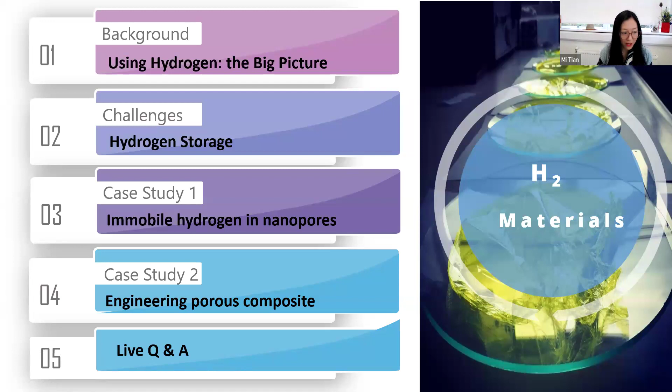So in today's lecture, I'm going to start by giving a brief background of hydrogen energy and why hydrogen matters, and one of the biggest challenges in using hydrogen, hydrogen storage. And finally, I'm going to focus on two of my research projects. I hope by the end of the lecture, we can share some common interests leading to the Q&A session.

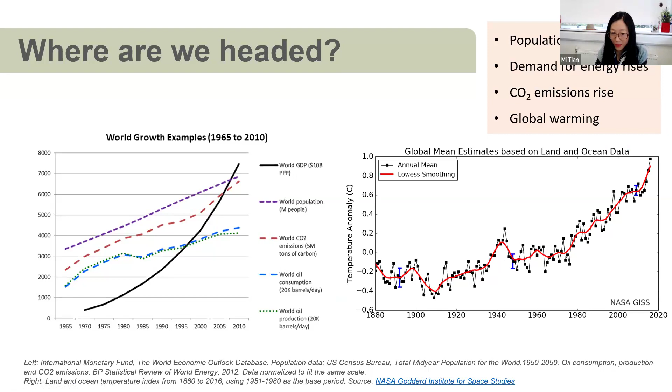It's very clear where we are headed. If we look at the world growth example, we can see world population growth, the energy consumption increases, leading to CO2 emission increase, resulting in global warming. So scientists agreed that a temperature rise of more than 2 degrees Celsius would have an unprecedented impact on our lives. So to help us stay within that 2 degrees Celsius temperature limit, carbon emissions need to be reduced to zero by 2050. It's astounding.

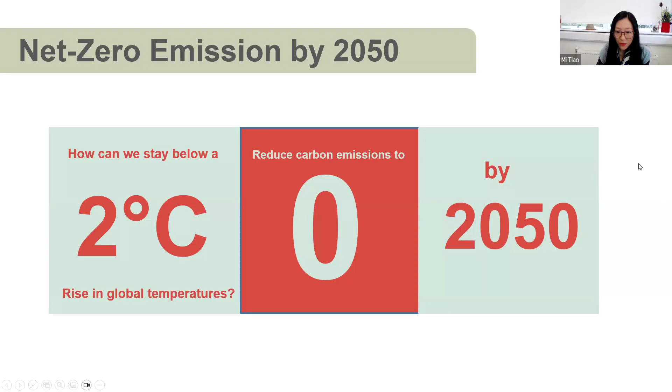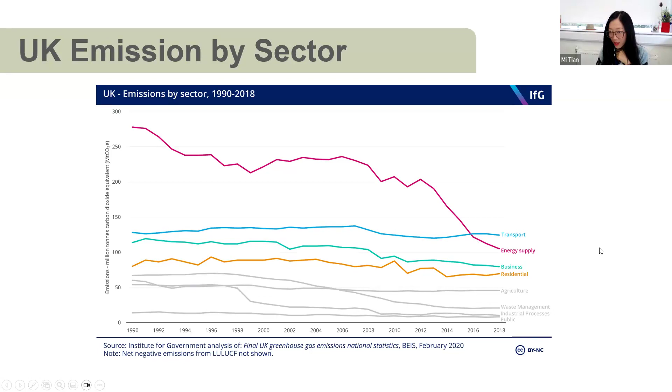So if we look at the UK's carbon emission by sector, we can see the emission from energy supply has dramatically decreased since 2012. That is because of phasing out coal in the UK. However, if you look at other sectors, transport and business, agriculture, the carbon emissions remain very stable. That's the main challenge for the reduction of carbon emission.

To deal with this energy crisis we're experiencing, and the pressure from the net zero commitment, the UK government and also globally have put a lot of attention and investment on hydrogen energy since 2019. For example, in 2020, the UK government released a 10-point plan for a green industrial revolution, in which it set a target of 5 gigawatts of low carbon hydrogen production. And after 2 years, they doubled this target to 10 gigawatts of low carbon hydrogen production. And also the government recognized hydrogen energy will play a key role in its energy security strategy.

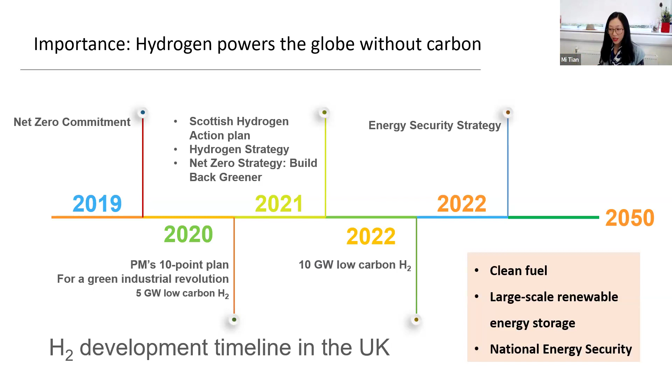So in my view, hydrogen will play a significant role in the future energy system as a clean fuel, a large-scale renewable energy storage, and it will also significantly contribute to national energy security. So that's the big picture, the background about why we are going to use hydrogen.

So we can see there's an intention to move away from carbon-based fuel to more renewable resources. And the potential for solar power and wind power is enormous, which are actually able to satisfy our global energy needs many times over. Why aren't we making more use of these resources? Why are we finding it hard to meet our targets and our commitments to renewable energy generation?

Because these renewable energy resources, solar energy, wind power, are inherently intermittent. So we can't rely on the sun shining or wind blowing, because we are not able to store the renewably generated electricity at grid level, large scale. We might only be able to turn the lights on when the sun is shining, which is not very helpful.

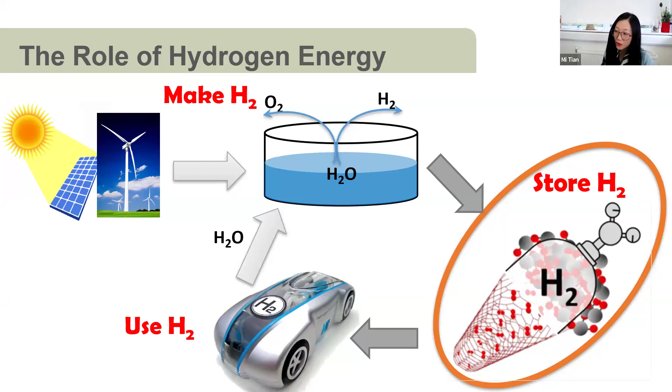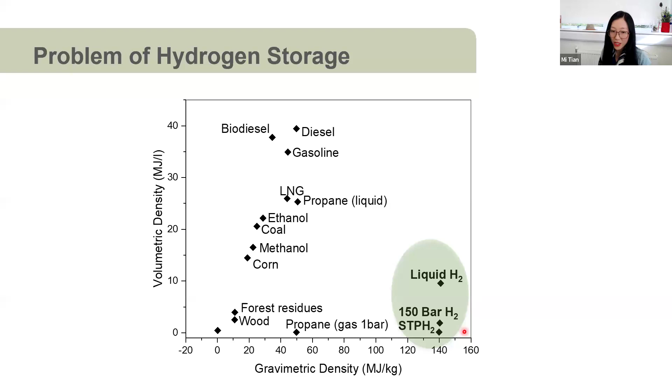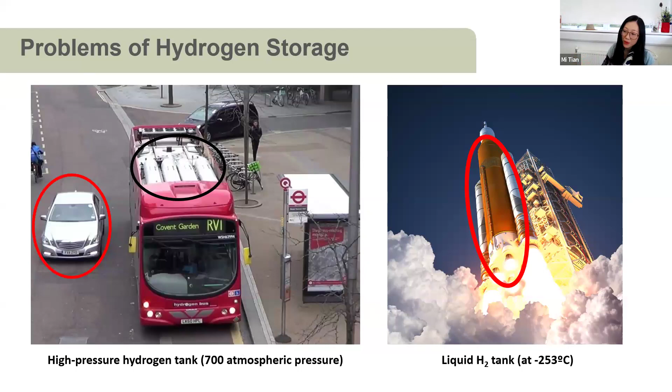Both methods, either high pressure or cryogenic temperature, are very difficult and expensive to achieve and maintain. They also pose serious risk issues. Okay, so we want to solidify hydrogen, or store hydrogen in solid phase. A solid hydrogen storage not only solves the storage problem, but is also predicted to be a near room temperature superconductor. Hydrogen phase can be changed by changing temperature or pressure.

If we think about water, that's an easy example. If we heat water up to 100 degrees C in air, then we get gaseous water, that is steam. If we cool down water to 0 degrees in air, we get solid water, ice. This is a very similar process for hydrogen gas, but hydrogen's boiling point and freezing point are much lower. To solidify hydrogen, we need to either cool down the temperature to 14 Kelvin or increase pressure to 400 gigapascal. Those are very extreme conditions, very difficult and expensive.

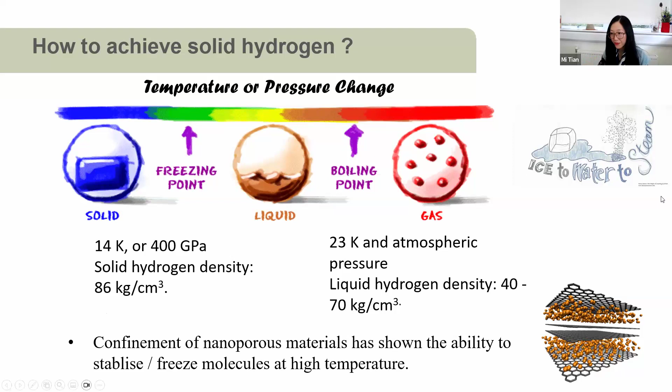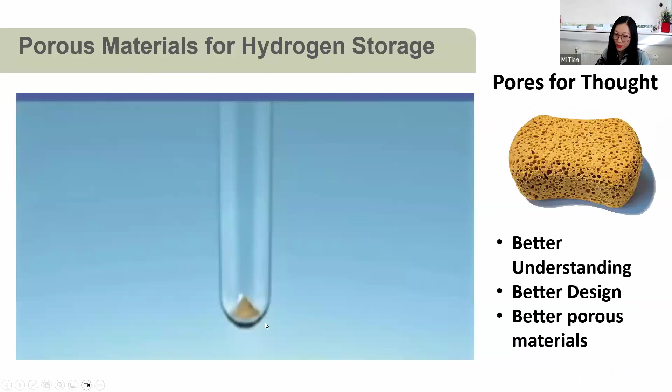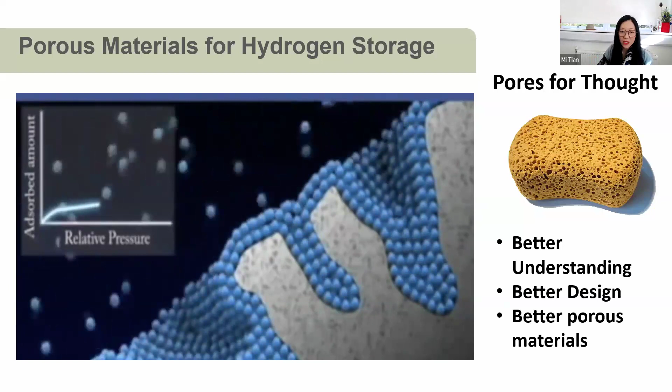And then we found nanoporous materials have shown the ability to stabilize, to freeze the hydrogen molecules at a much milder condition. The very special feature that porous materials offer is a large surface area and very tiny pores. So as soon as we expose this clean porous surface to gas, this tiny space will adsorb, compress, and store gas molecules. So we call these nanoporous materials a molecular sponge. Like a sponge absorbs water, our novel molecular sponge can absorb hydrogen.

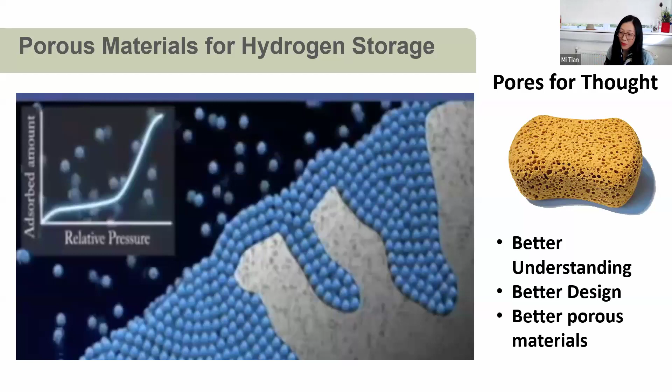So my job is to gain better understanding of how hydrogen molecules interact with the surface, therefore leading to a better design for porous materials. One of the challenges in my research is how to characterize hydrogen. As mentioned, hydrogen is a lightweight gas, is invisible, and is insensitive to lab-based technology, for example, X-ray diffraction. Therefore, we found the neutron is the best candidate for this job. A neutron is highly sensitive to hydrogen.

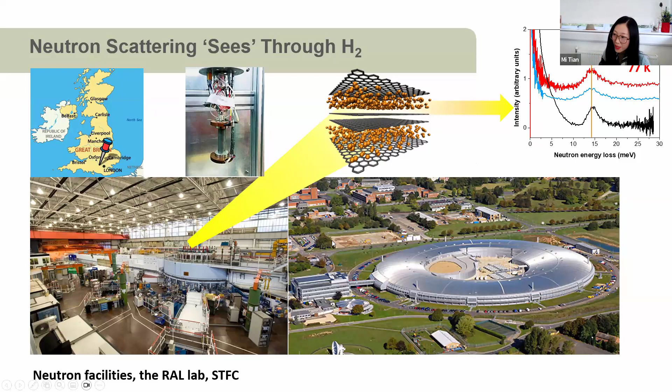A neutron beam can deeply penetrate everything, the cryostat, the high pressure sample container, the sample itself, and directly probe gas molecules inside the pores. This is a typical inelastic neutron scattering pattern. So this is the neutron reactor. The experimental procedure is: we seal the container with the central stick here, then insert everything into the cryostat underneath the floor, cool down the system to the desired target temperature, and then pump hydrogen in. Then we shine the beam through and collect the data.

At 12 Kelvin, we collected the neutron INS data, and we found a sharp peak at 14.7 meV. That is a characteristic peak for solid hydrogen, because we only pumped pure hydrogen, solid hydrogen at 12 Kelvin inside the reactor. Then we bring the temperature up to 17 Kelvin, and the solid hydrogen melts to the liquid phase. We see this sharp pronounced peak disappear, broadening into a big bump. If we continue increasing the temperature beyond 25 or 30 Kelvin, this broadened peak completely flattens. So this red curve, this pronounced peak, is for solid hydrogen.

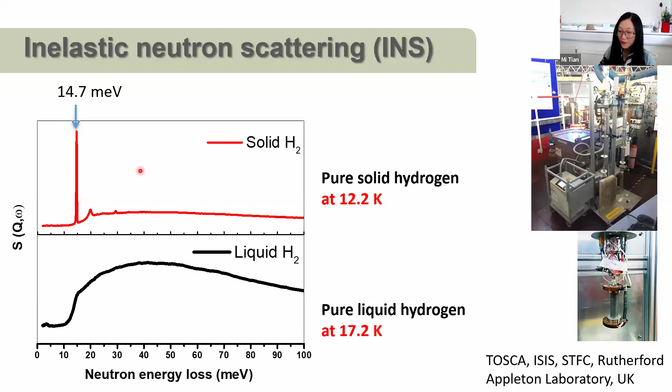And then we apply our materials following the same procedure in the neutron reactor. We pump the hydrogen in, but instead of cooling down the temperature to 14 Kelvin in order to achieve solid hydrogen, we cool down to 77 Kelvin. That is liquid nitrogen temperature, which is much more affordable, easier to achieve and maintain, okay?

So surprisingly, we see the characteristic peak at 14.7 meV. That is a characteristic peak for solid hydrogen, but by applying our material, we can achieve that at liquid nitrogen temperature. That is much more practical. And we collected data at different pressures, and we see the intensity increases, indicating the accumulation of solid-like hydrogen increases as gas pressure increases. Okay.

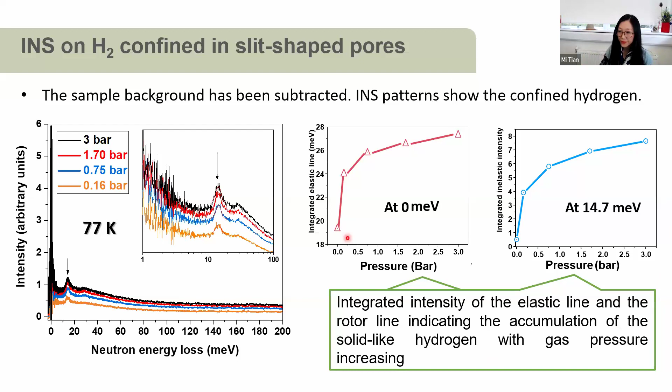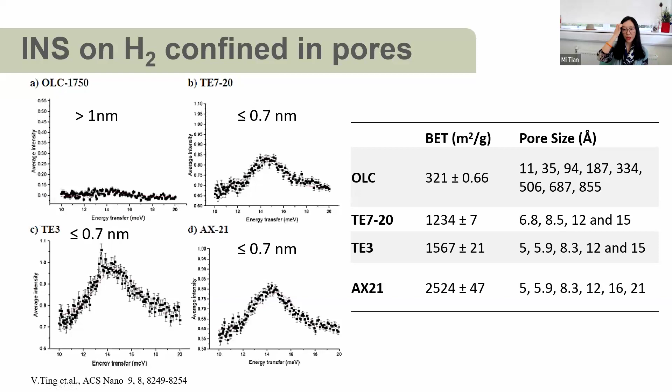There's an obvious question: do all porous materials work on this principle? Actually, no. We tested different materials, and we realized only porous materials with very tiny pores, less than 1 nanometer, can solidify hydrogen at this condition. For example, this onion-like carbon has a pore size larger than 1 nanometer, and we don't see the solid hydrogen peak. This means when the pores of a porous material are too large to accommodate solid-state hydrogen, it's not very useful in this case.

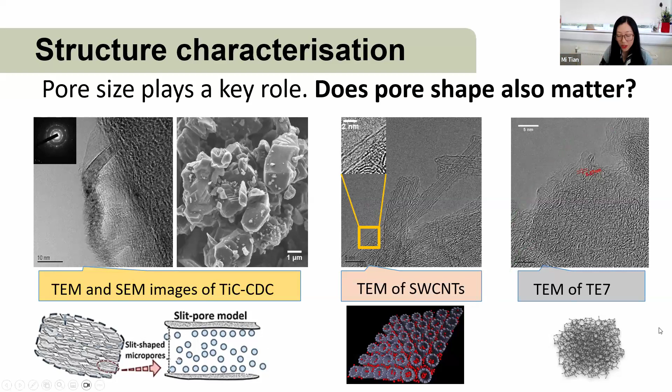We know the pore size plays a key role; we need to keep the pore size smaller than 1 nanometer. But does the pore shape also matter? To answer this question, we selected 3 different pore shapes. The slit-shaped pores: we can see the few-layer carbon sheets represent slit-shaped pores. We also have single-wall carbon nanotubes representing cylindrical pores. And also completely amorphous carbon. From the INS experiments, hydrogen can be confined in different pore shapes as long as the pore size is small enough.

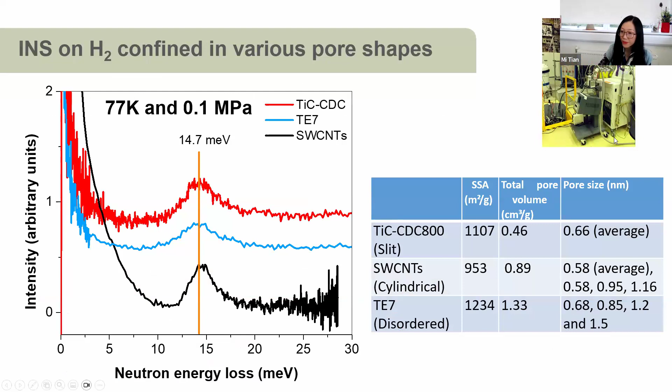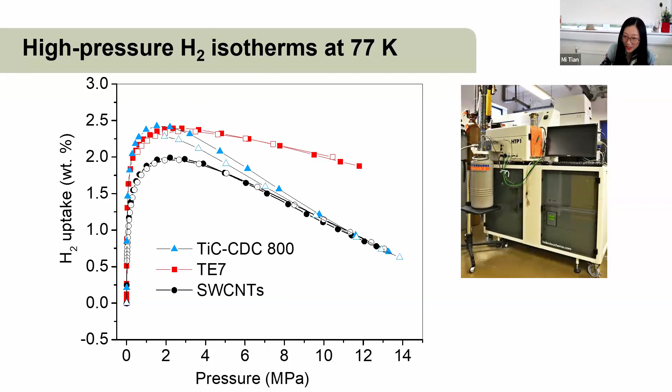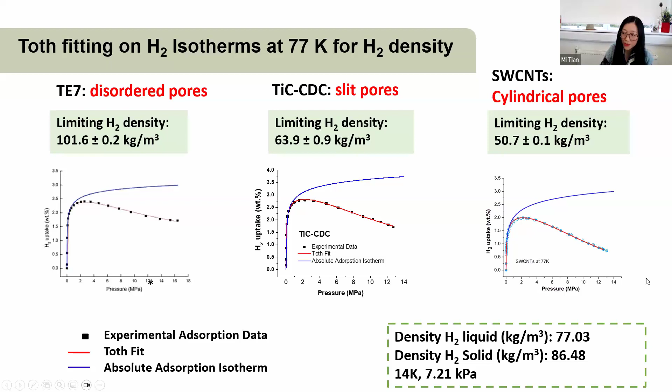Of course we care about how much hydrogen the material can store. We carried out high pressure hydrogen adsorption at 77 Kelvin, liquid nitrogen temperature, and we found the single-wall carbon nanotubes have slightly lower hydrogen storage capacity. From the high pressure gas adsorption, we can calculate the hydrogen density inside the materials. We found that the amorphous carbon has the highest hydrogen density, even in the solid hydrogen density range, and the single-wall carbon nanotubes have the least hydrogen density.

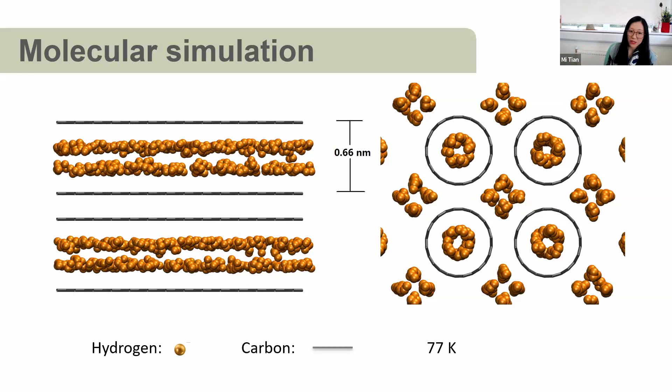On the other hand, in cylindrical pores, from the right-hand figure, we can see the structure of confined hydrogen is different. They are in a spherical structure with a certain mobility. So the density is much less than the two-layer structure. That explains the reason behind the hydrogen storage measurement.

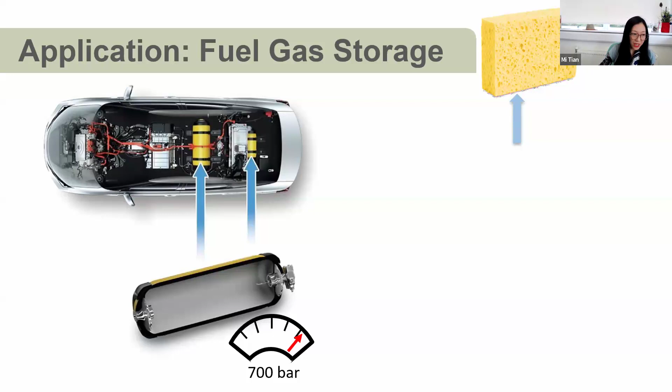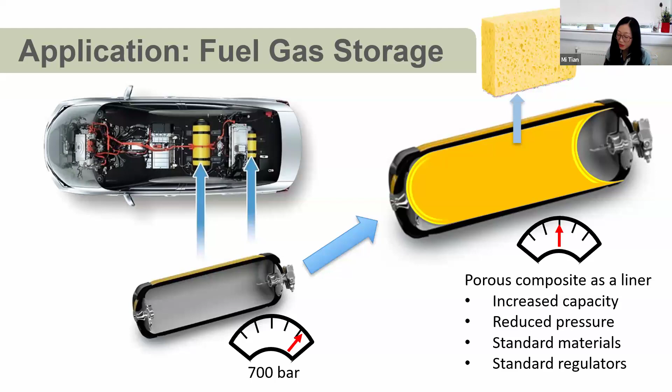So we achieved success in this theoretical study, and we know the optimal pore structure for hydrogen storage. Based on that, we decided to engineer our material for a new generation hydrogen storage tank. We want to have a liner inside the high pressure hydrogen storage tank using our porous composite in order to either increase the hydrogen capacity or reduce its pressure. Therefore, we can use more standard material and standard regulators, reduce the cost and improve the safety.

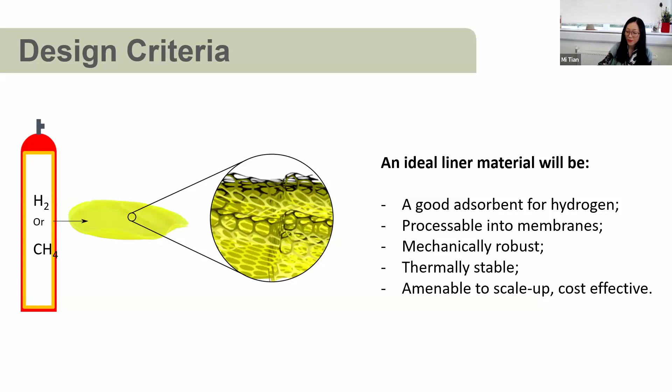Our design criteria for the ideal liner material: a good adsorbent for hydrogen. It also can be processed into membranes, because most current porous materials are in powder form. Powders are very difficult to manage in industry, and especially we cannot really use powder inside the hydrogen tank with the super high flow rate. Therefore, we need to find some material that can be processed into membrane. And it needs to be stable and robust. So we found the polymer of intrinsic microporosity.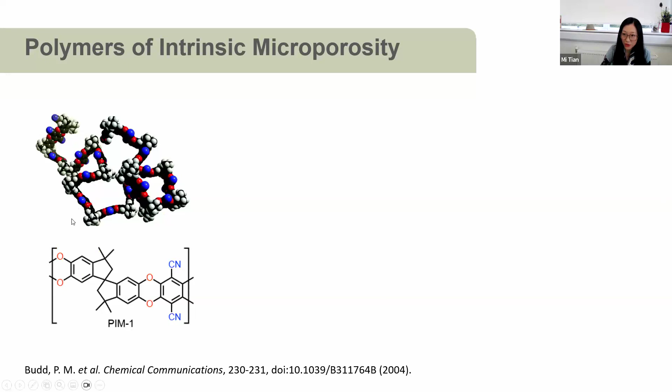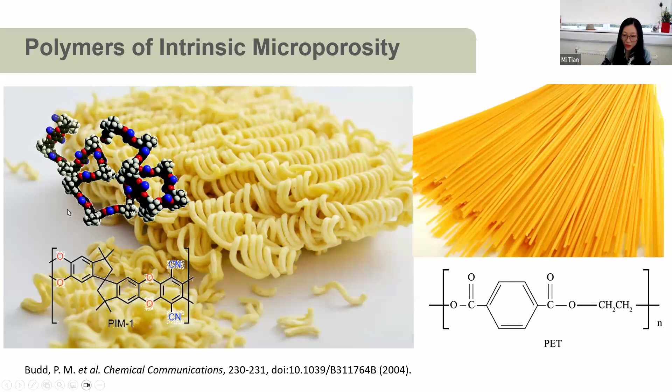You can see this is the molecular structure of PIM-1. PIM-1 is not like a traditional polymer. A traditional polymer has a long linear chain which can be packed efficiently, so there are no voids. PIM-1 is very special. It's got this rigid, contorted angle here, which cannot be packed efficiently, leaving a lot of voids in its long chain. That is where the porosity comes from.

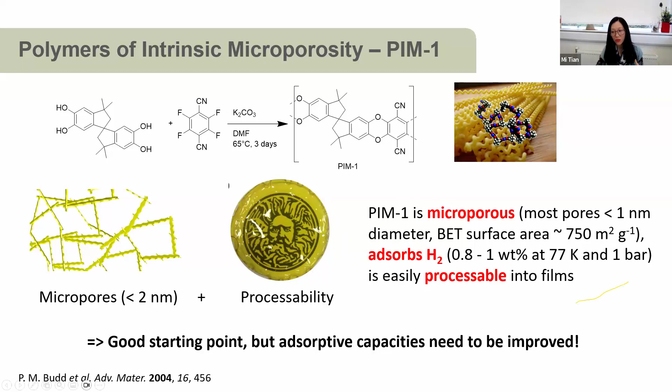So PIM-1 is a microporous material. Most of the pores are less than 1 nanometer, and that is the ideal pore size range for hydrogen storage. It can adsorb hydrogen from about 0.8 to 1%, which is not really ideal, but okay. The most important property of PIM-1 is it can be processed into membranes, transparent yellow membranes. So this is a very good starting point. But the porosity is low; hydrogen storage capacity needs to be improved.

In order to improve its hydrogen storage capacity, we doped PIM-1 with different porous fillers, for example, PAF-1, one of the MOFs, and activated carbon. All those porous fillers have an extremely high surface area, around 3,000 square meters per gram, and also a small ideal pore size less than 1 nanometer, good hydrogen adsorption capacity, and are also stable. So by doping PIM-1 with porous fillers, we can combine the good mechanical properties and processability of PIM-1 with the good hydrogen storage capacity of porous fillers as a composite.

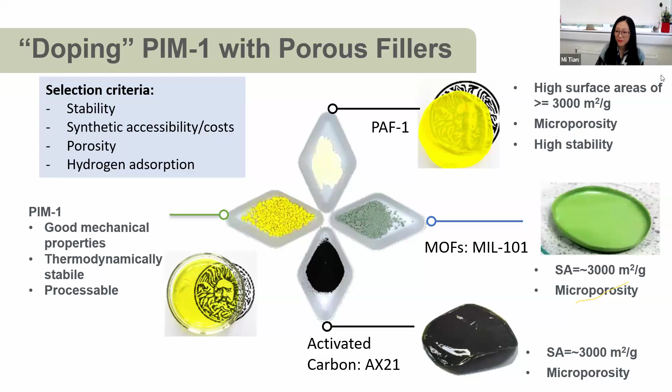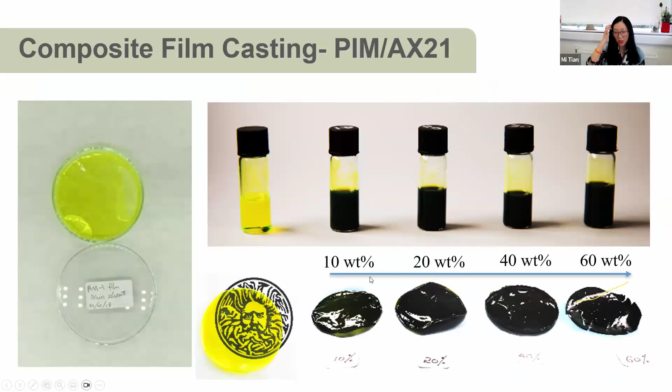These are composite membranes we fabricated. We dissolve the PIM-1 powder granules into DMF, and then we mix with different porous fillers at different concentrations. Then we cast it into a Petri dish. When everything has dried out, we can lift the freestanding robust film up, just like the video shows here.

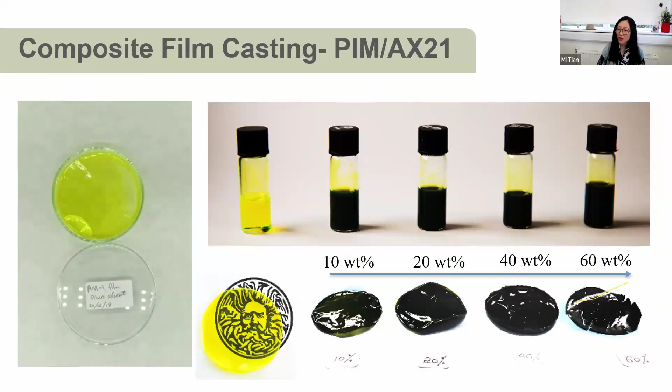So these are different. The black films are actually the PIM-1 activated carbon composite membranes. These two are PIM-1 with different porous fillers. And we can see, obviously, as the concentration of fillers increases, the transparency decreases and flexibility decreases. At some point, the membrane cannot hold its physical properties and cannot form a membrane anymore. It's loose and completely loses its mechanical properties. So there's always a balance between the hydrogen storage capacity and mechanical properties.

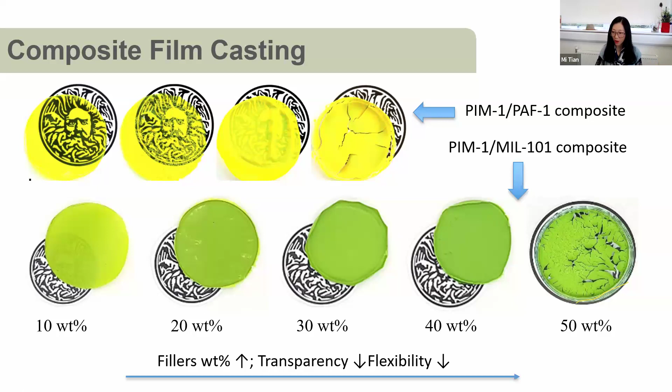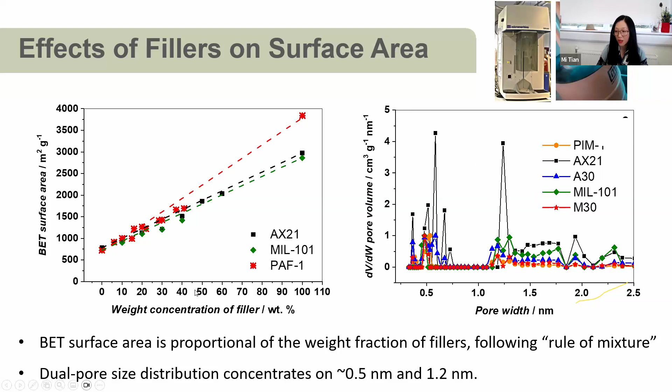So then we measured the BET specific surface area, which is a key indicator of how good the material's adsorption capacity is. So we can see the surface area increases and has a linear correlation with the filler concentration, which follows the rule of mixture. And the majority of pore size is less than or around 1 nanometer. So it all follows our design.

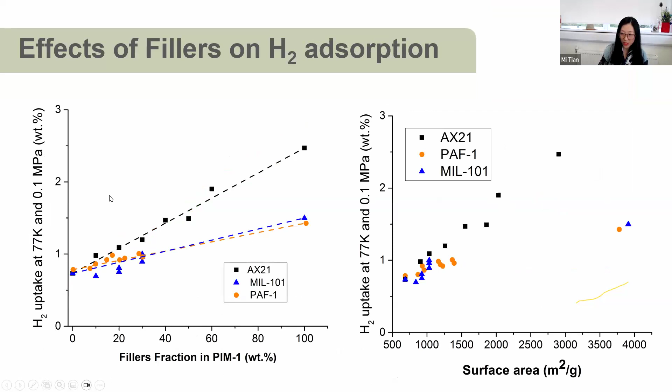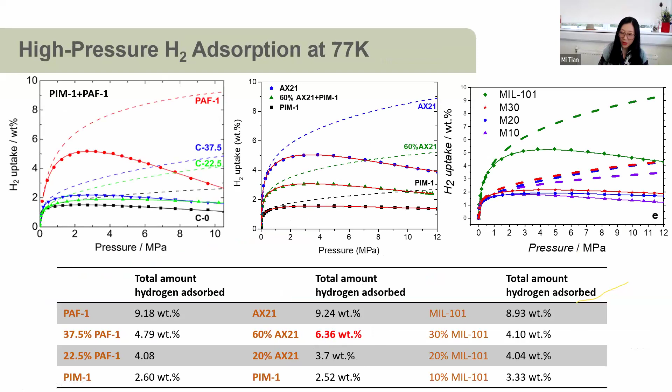Hydrogen capacity also follows the rule of mixture, a linear relationship with the filler fraction. We can see the maximum storage at low pressure is 2 weight%. And then we carried out the high pressure gas adsorption, which gives the full picture of the total storage capacity. So we can see the maximum capacity is this one, which offers around 6 weight% capacity, already beyond the Department of Energy target of about 4.5 weight%.

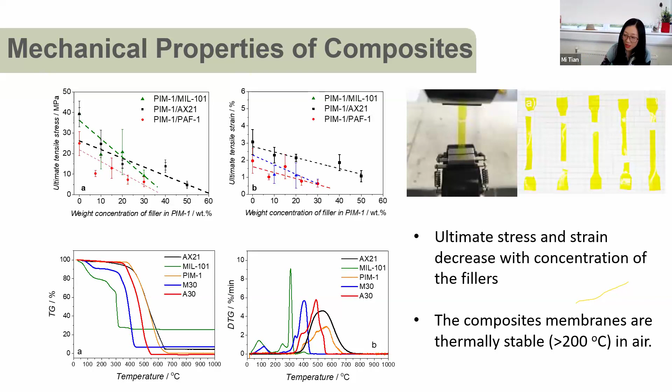Of course, we measured the mechanical properties of the composite membrane, how strong it is. So we measured the stress and the strain, and we found the stress-strain curve decreased with the concentration of the fillers, which is not surprising. And the composite membrane is thermally stable; it can stand beyond 200 degrees C in air, which is really good.

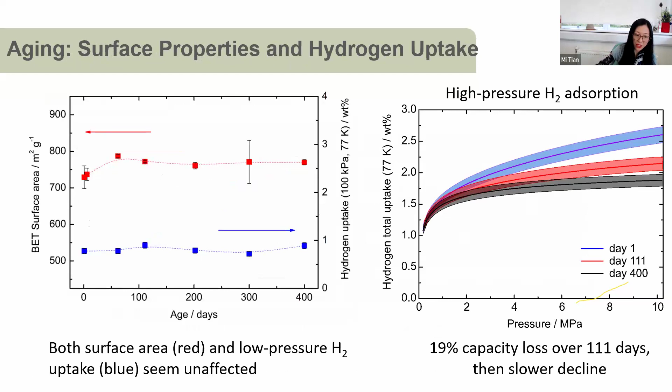Another problem for polymer membranes is aging and degradation. A lot of polymers degrade over time. So to evaluate the aging properties of the polymer, we kept the materials in the same condition over time and measured the mechanical and other properties, and we found the mechanical properties evolve in the first 50 days and then stabilize. Young's modulus doesn't change significantly. Surface area and the low pressure hydrogen uptake stay stable, seemingly unaffected by aging. But the high pressure capacity drops over 100 days and then slowly declines.

So now we've thoroughly explored the performance of our PIM-1 based composite membranes. We then considered the manufacturing strategy. A key aspect of this strategy involves shaping the composite to fit our needs. In our case, the goal is to integrate this composite into a high pressure hydrogen storage tank. This application needs a variety of shapes, meaning our manufacturing process must be flexible enough to create complex geometry as required.

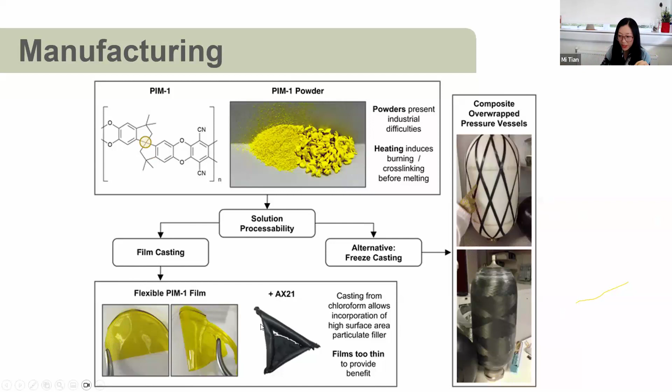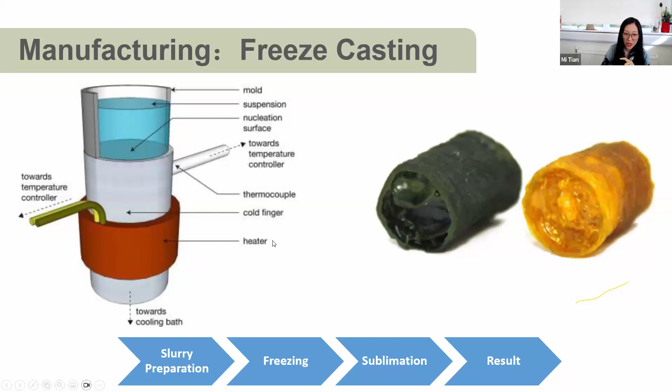So that is one method we explored. We used film casting, and then we realized the thin film is not sufficient to provide enough hydrogen storage capacity. So we need to shape it. And then we used the freeze casting method to make a monolith. So those are two monoliths we are making, which significantly increased the capacity. And we evaluated the mechanical properties of the monoliths, which can satisfy the hydrogen storage tank application.

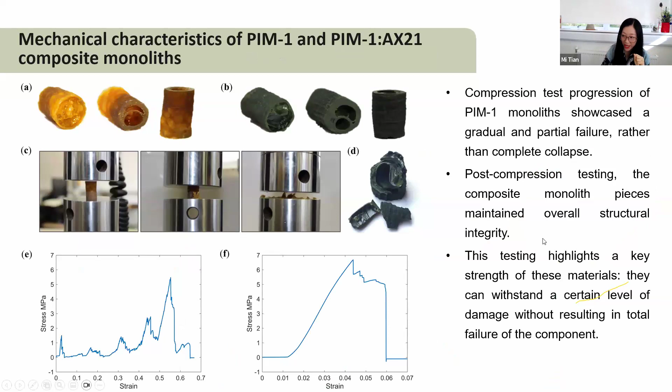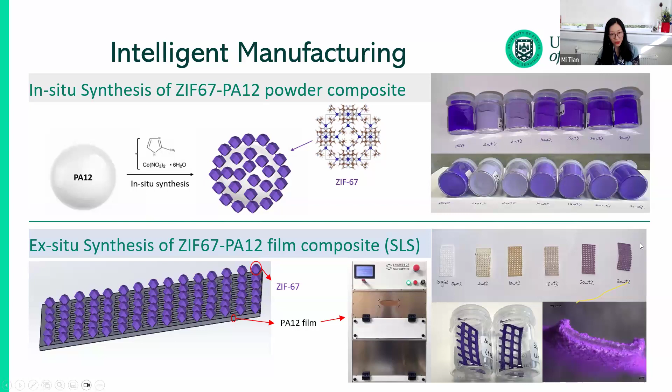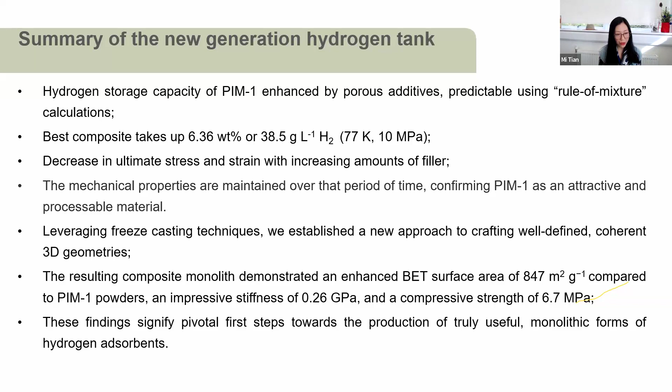So that brings us to the end of my talk. Just to quickly summarize the new generation hydrogen storage tank: I hope I convinced you hydrogen energy is going to play a role in the future energy system, and hydrogen storage is a key challenge in the whole of hydrogen energy applications. Our research has demonstrated a strategy to solve the low density problem of hydrogen storage and transportation. We are carrying it from theory to engineering level. And these findings are a first step towards the production of truly useful material to solve real world problems.

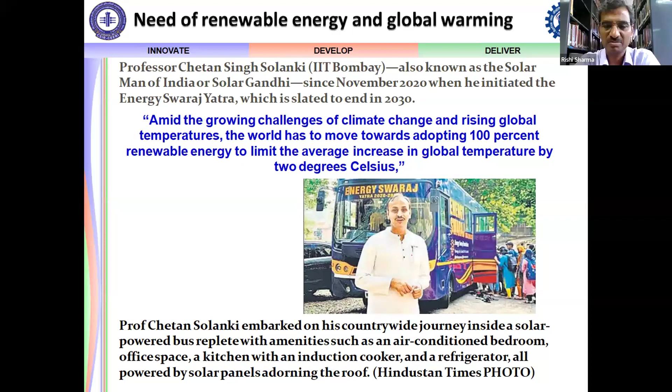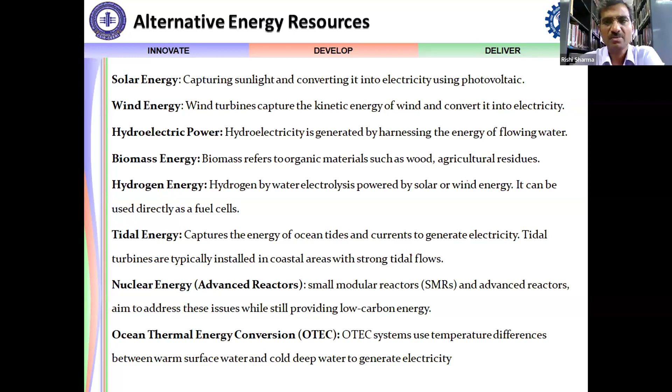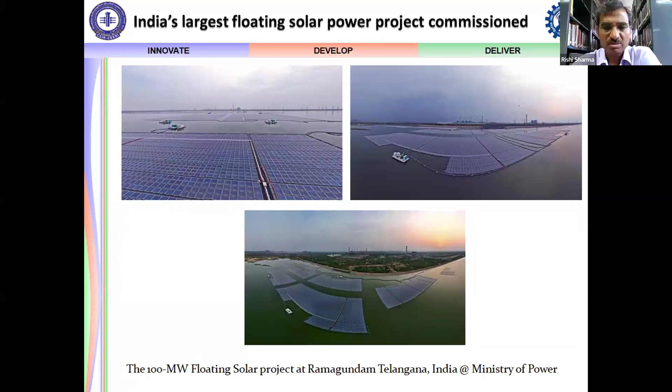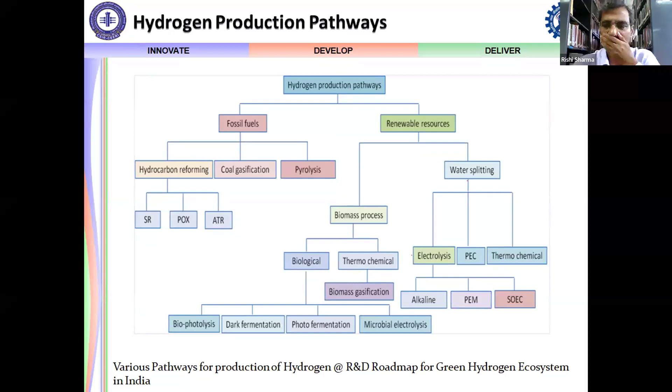I think there is a network issue.

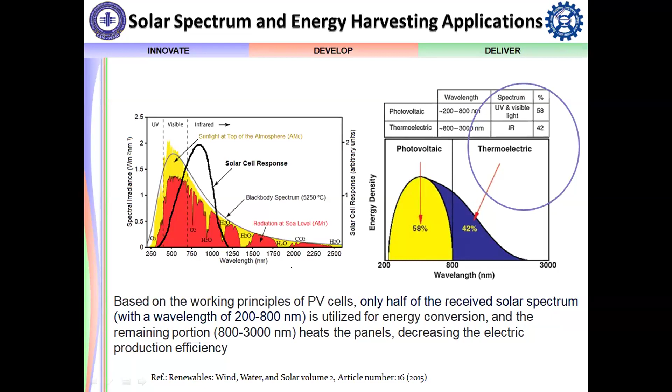Thermoelectric is one of the methodologies useful to harvest energy. A lot of research is also going on. It is basically based on the Seebeck and Peltier's effect, where two materials are joined and the temperature difference is utilized for the generation of energy.

So by utilization of microfabrication techniques, one can develop a small energy harvesting system utilizing thermoelectric energy.

Then other is the EDLC and supercapacitors, which is also one of the areas, because research for energy harvesting is also important for devices and systems which are implanted on the body or wearable sensors. So EDLC kind of sensors, which is the base for development of supercapacitors, are important for transferring more power at the time of need.

So supercapacitors are different from normal batteries in the sense that when we require more power, high power can be easily transferred with the use of supercapacitors.

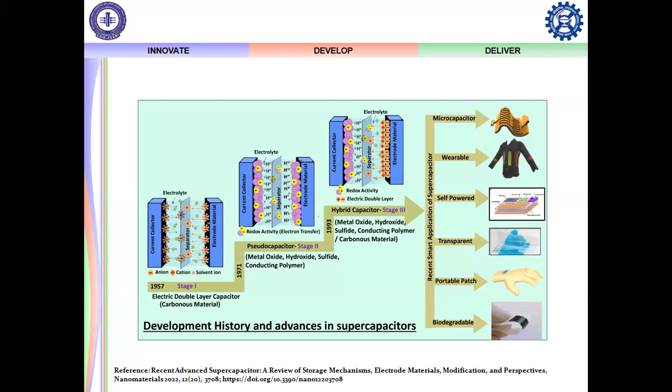Yes, work we did around 2 to 3 years back, where we used graphene as one of the materials, and during the development we were also trying to enhance the energy storage capacity of the micro supercapacitor. For that, we used graphene along with polypyrrole as a binding material. By utilizing two reactions at the same time, using ammonium persulfate and H2SO4 simultaneously, we developed a method for the generation of graphene nanoscrolls.

Graphene nanoscrolls are different from CNT, carbon nanotubes. We prepare graphene by the exfoliation technique from graphite using Hummers' method; there are various methods through which graphene can be developed from graphite. Electrochemical techniques are also there. So we used Hummers' method to generate the graphene, and then simultaneously polymerized polypyrrole along with the graphene. And with different oxidants in an acidic medium, we generated the graphene nanoscrolls.

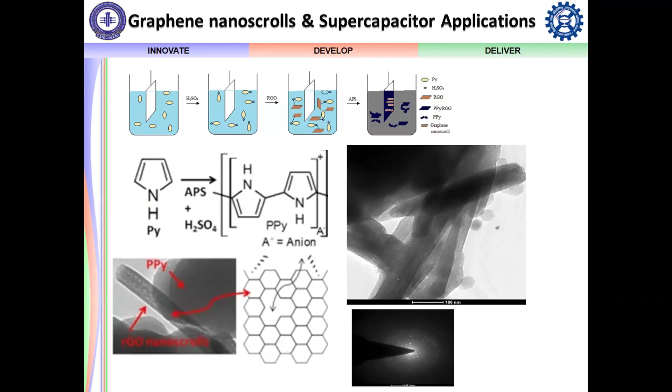Graphene nanoscrolls have the capability to generate a porous structure, which is very important for easy electron transmission through the membrane for higher energy storage. On the left hand side, you can see the TEM image of the graphene nanoscroll, where the graphene carbon particles are visible. On the right side, it shows a lot of scrolls formed along with the polypyrrole, the typical structure of a graphene nanoscroll, where the small gaps show the presence of carbon particles.

Through TEM and HREM, we can also evaluate the distance between carbon-carbon atoms to confirm the graphene nanoscroll. So we checked it, and on the left hand side we can see it is a very porous structure, and the graphene nanoscrolls are embedded in this polymer matrix. This material is then used for the supercapacitor, and we did the cyclic stability test. The good part is that it can be fabricated directly on microstructures by dipping it in the solution, followed by electrolyte encapsulation.

We tested it in the two electrode method, where on one substrate the EDLC capacitor is formed, and it is tested in the presence of sulfuric acid. We tested cyclic stability, and the specific capacitance was quite good, more than 600 farad per gram. Further, we worked on the miniaturized structure, which further increased the specific capacitance of that material.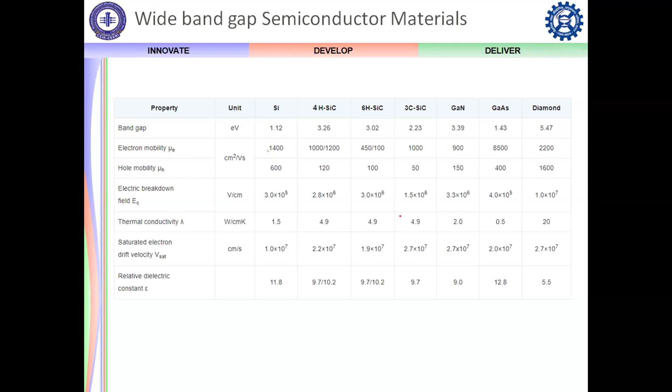Along with this, we have also worked on the development of aluminum nitride and titanium nitride. These materials also come under the category of wide bandgap materials. Since the material is useful for energy harvesting applications, we have developed that material. So I am highlighting the applications of those materials which we have also worked on. I'm just going to briefly touch on these slides.

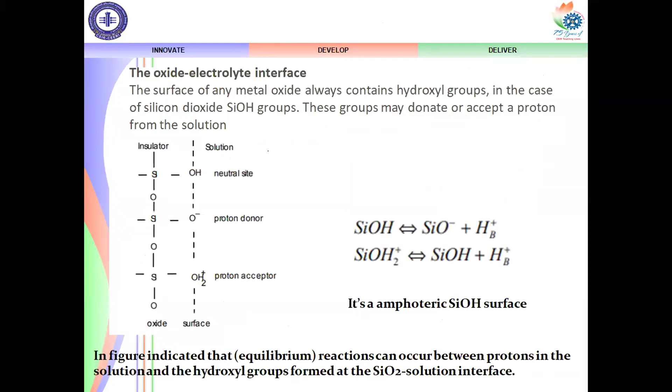It is more to do with the FET based sensors which we have developed at CEERI, the ion sensitive field effect transistor, which we have used for pH sensing applications. In this, we have used different configurations for these FET structures. I'm not touching it in detail since it is not directly correlated to the conference theme, but we have utilized these materials for pH sensing applications

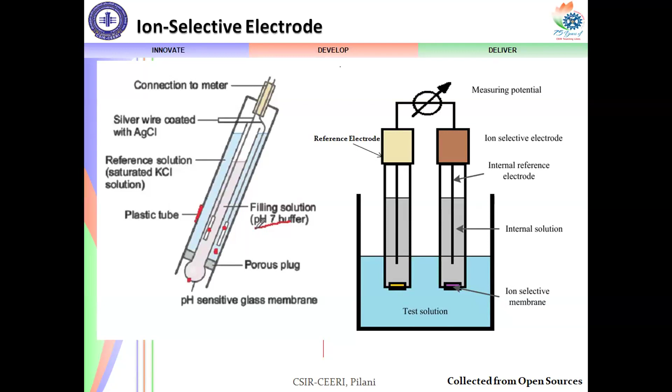using the ion sensitive field effect transistor, which is equivalent to a MOSFET where the top gate of the MOSFET is replaced by the thin film, and it is used for testing different ionic solutions and also for biosensing applications. This is an example of ion selective electrodes. The ISFET is equivalent to an ion selective electrode, but it is the electronic version, because ion selective electrodes use a glass based cell.

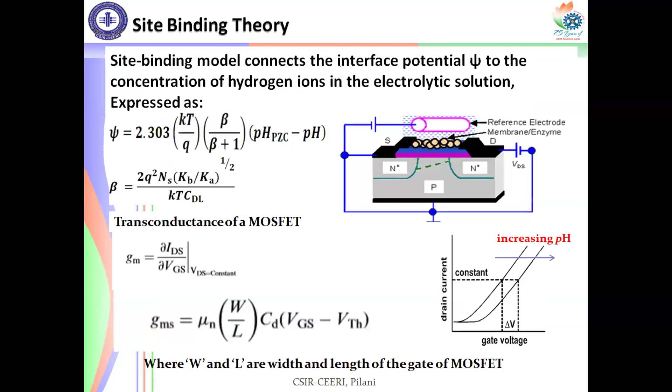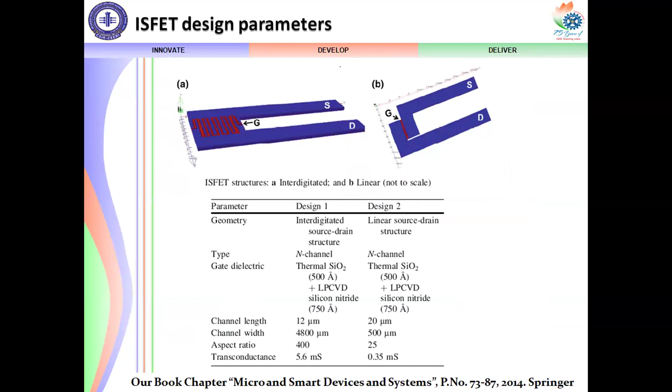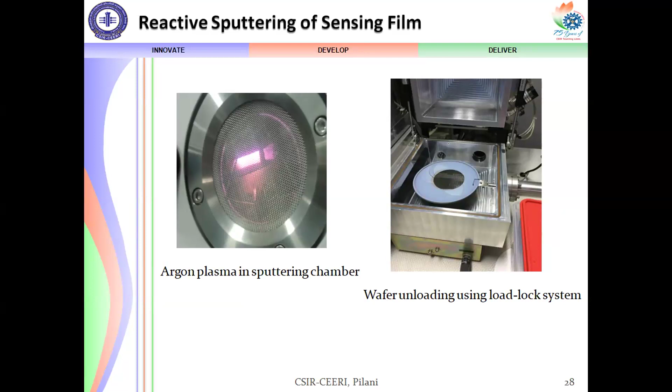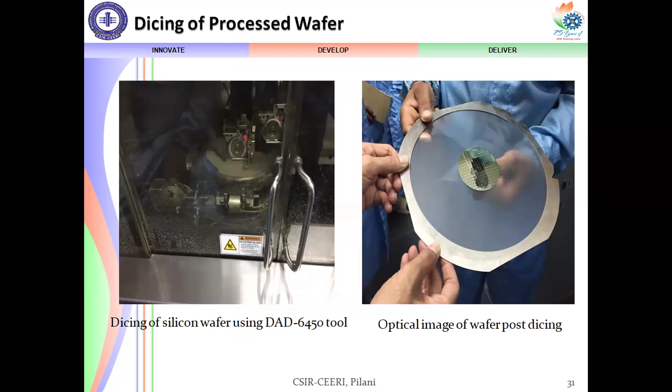We have worked on the reactive sputtering method to fabricate the titanium nitride and aluminum nitride films. These films are now used for energy harvesting applications, including piezoelectric based energy harvesting systems, as well as supercapacitor based electrodes. This is the ISFET, and this is the deposition of titanium nitride and aluminum nitride on the silicon wafer.

We have tested titanium nitride based materials. These are rugged, very hard materials, so they are very stable in harsh environments. They are used as electrode material even for hydrogen based and hydrogen storage applications, and are also useful for supercapacitor development, where TiN is one of the electrode materials. So in that way, this material development is useful. We have tested it for pH, and work is going on for energy harvesting applications.

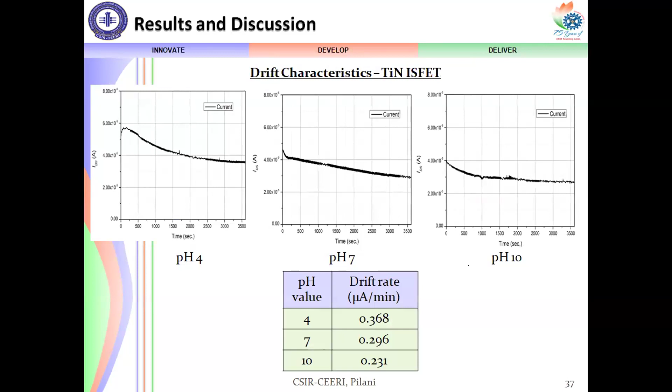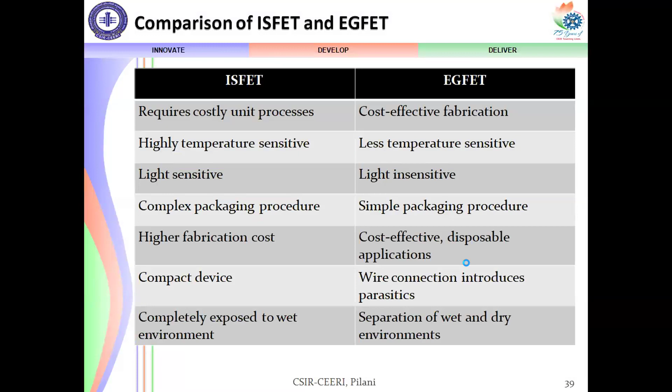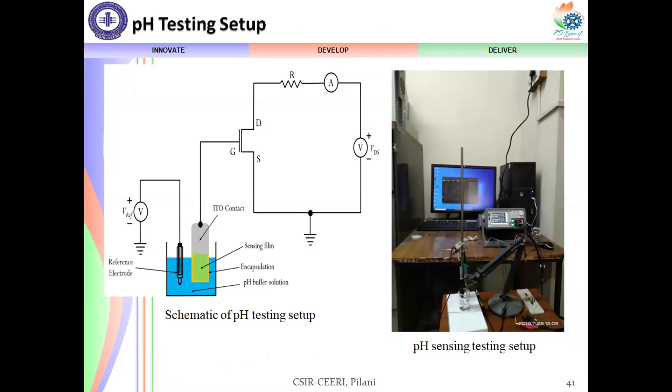This is the stability of titanium nitride. We have tested pH 4, 7, and 10 repeatedly and found that this film is very stable, so the development of titanium nitride is very successful. We have tested the drift analysis of the TiN based ISFET also. Similarly, the extended gate field effect transistor was replicated using the same material. This is the pH sensing setup for those electrodes, and this is the testing of the EGFET using a titanium nitride gate.

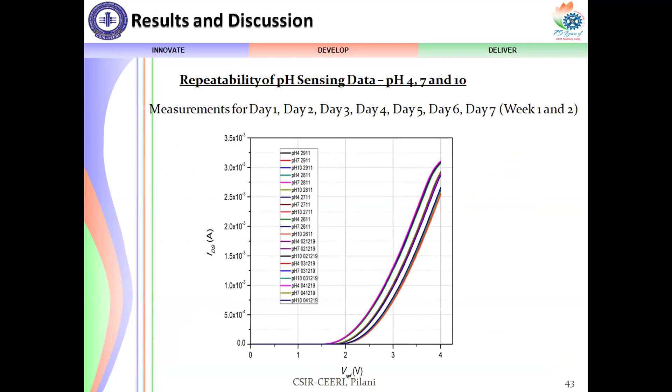Since this material is very stable, we have tested for many days the stability of that material at different pH levels, and we got repeatable results. This is the drift analysis of the titanium nitride based EGFET for pH 4, 7, and 10, and the drift was quite within limits, which can be catered for by a suitable electronic circuit.

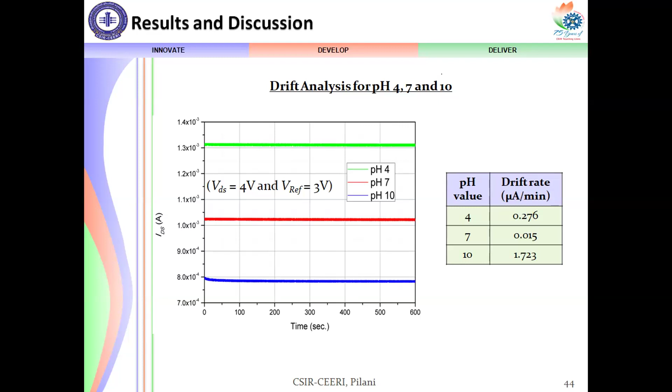So in conclusion, I have touched briefly on some of the existing applications and energy storage methods, and on utilizing titanium nitride and aluminum nitride based materials for energy harvesting applications.